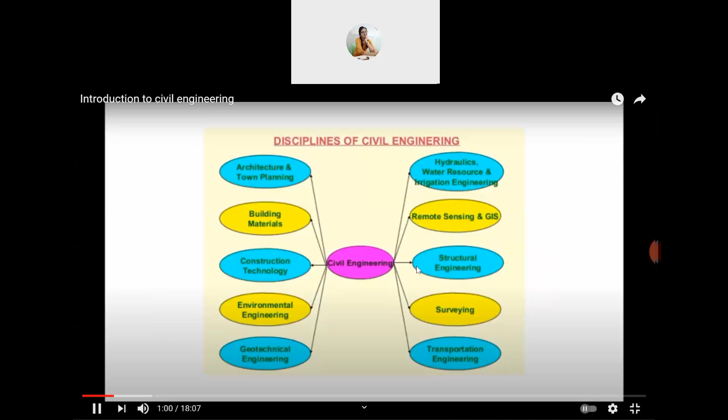So these are the disciplines of civil engineering. First one is architecture and town planning. What is the importance of architecture? Architecture gives beauty to buildings, enhances the appearance, and maintains heritage. Town planning is now separated from civil engineering.

Town planning includes planning the layout of the town, planning roads in different gridways, separating commercial, residential, academic and industrial areas, planning green belts. Very important is planning proper sewage and disposal units, water treatment plants, and water storage units. These are all included in town planning. It was once part of civil engineering, but now it is separated.

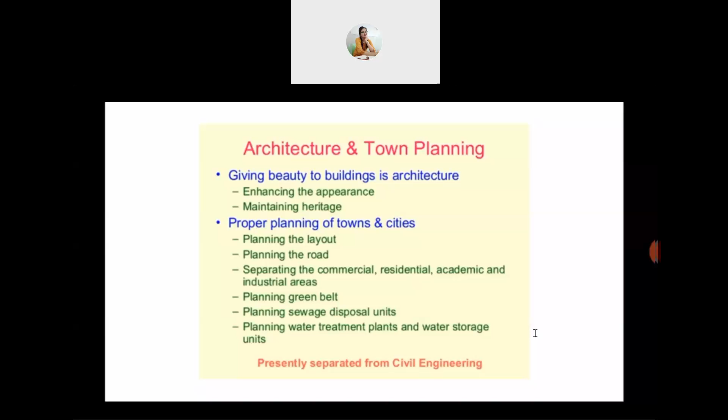Next is building materials and technology. What are building materials? They are the materials used for construction of buildings - bricks, tiles, soil, cement, stone, sand, steel, etc. These materials can be available naturally or some are man-made. These days there are many new technologies and trends in the manufacturing process of building materials, and different varieties are available today.

So what does this building material technology deal with? It deals with proper use of desired material economically and safely. It is very important to use desired materials. There are many materials available, but it's important to choose the desired one, which is economical, and which is safe to use.

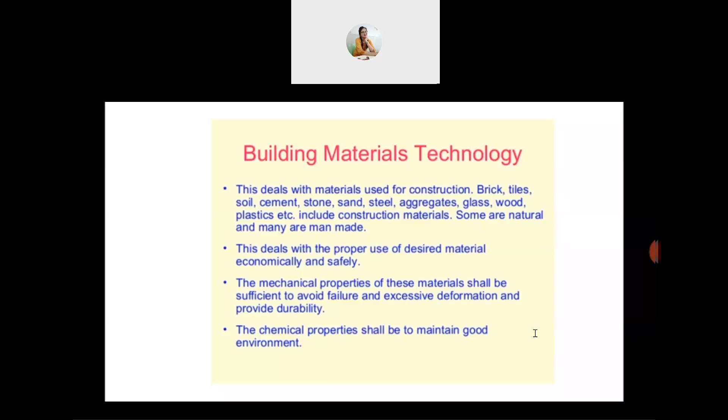Construction technology and management is one discipline which deals with planning, scheduling, execution of construction activities related to a project.

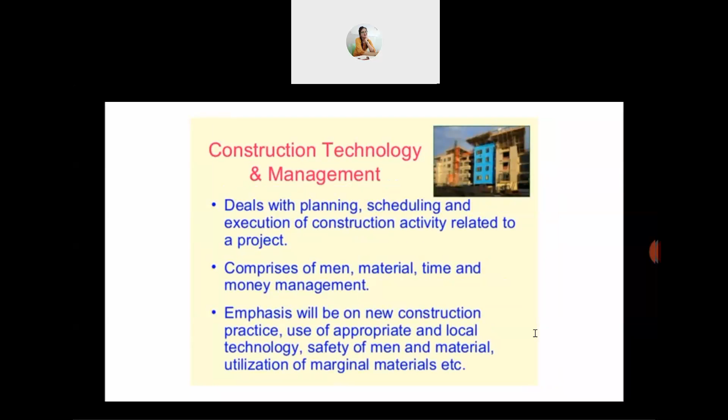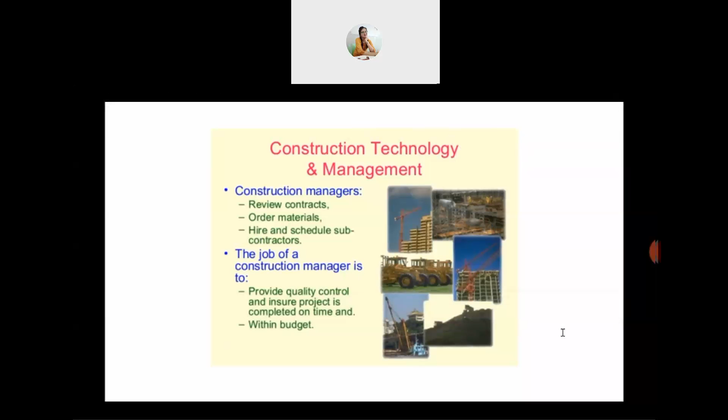So what exactly do construction managers do? They review contracts - you know a contract is a legal document. They order materials and hire and schedule sub-contractors. The job of a construction manager is to provide quality control and ensure the project is completed on time, within budget. As discussed, when we choose a building material, it should be economical.

Next discipline is environmental engineering. Generally people think environmental engineering means the study of environment around us. But what it actually deals with in civil engineering is the technology to save nature from human and natural abuse and pollution. The study involves a balanced compromise between environment and safety.

It deals with the technique of water collection, purification, and supply - we need to supply drinking water which is potable. At the same time, wastewater collection - we need to collect waste from different buildings, whether commercial, industrial, or residential. It deals with how waste is collected, treated, disposed of, or reused, and also control of all types of pollution, solid waste management.

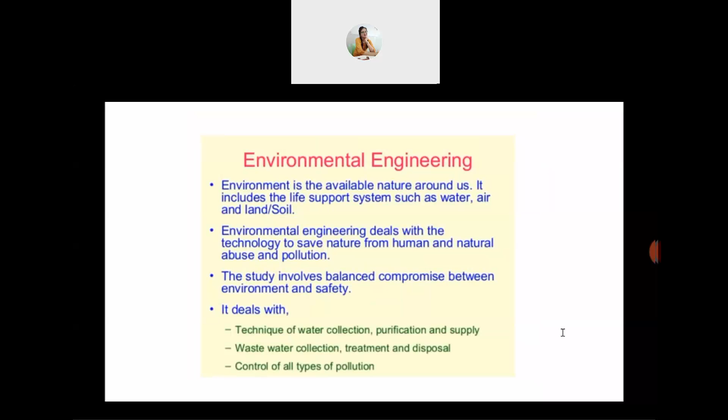Environmentalist versus environmental engineer - these are different. An environmental engineer deals with the technique of water collection, purification, supply, wastewater collection, treatment, and disposal, whereas an environmentalist deals with all aspects of environment.

Next discipline is geotechnical engineering. All structures are founded on ground, you know that. So what exactly geotechnical engineering involves is understanding ground behavior, soil characteristics, and interaction between soil and structure. It involves foundations, slopes, retaining structures, highway pavement design, embankments, earth dams, tunnels, underground structures, etc.

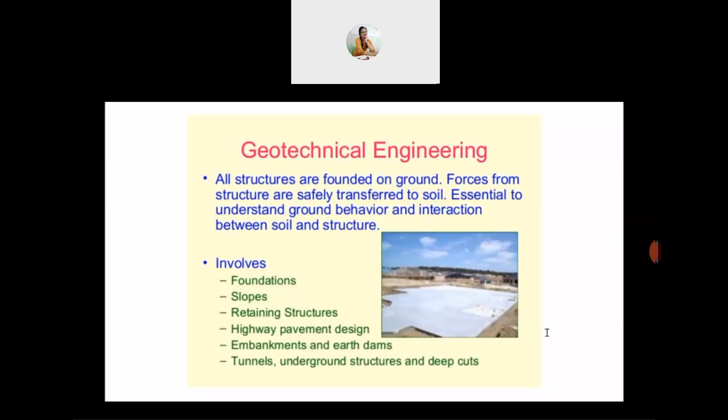What exactly is a foundation? Foundation is a structure which takes the loads from superstructure and distributes them to the soil safely. It is a very important element of any structure. In geotechnical engineering, we assess the quality of soil and rock to carry the structure. If the soil quality is not good, we either replace the soil or go for deep foundations. So proper knowledge of geotechnical engineering is very much necessary for safety and stability of structures.

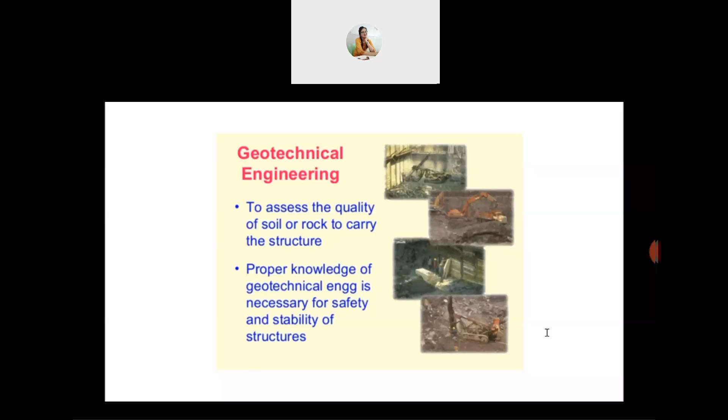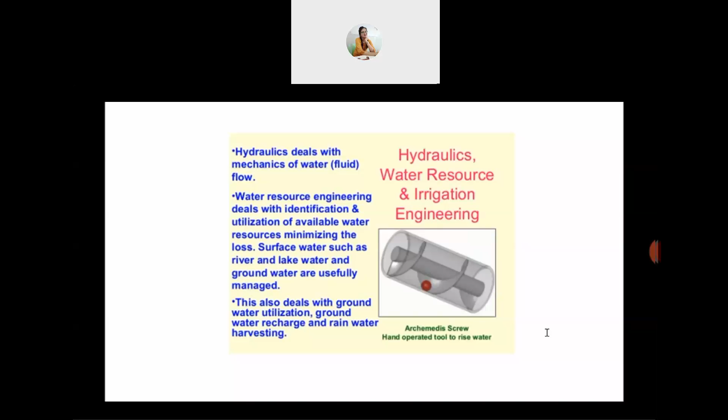Water resource engineering deals with identification and utilization of available water. Irrigation, you know what exactly irrigation engineering is - engineering dealing with irrigation is called irrigation engineering. Groundwater utilization, groundwater recharge, and rainwater harvesting - all these things come under irrigation engineering.

Next is hydraulics, water resource and irrigation - this we have already discussed. Irrigation engineering deals with water management for agriculture purpose. There will be how water is distributed from the dam to the very field channel.

So what is a dam? Why are dams constructed? Where are dams constructed? Dams are constructed at a desired location to store water. We cannot construct a dam in between a town, right? We need to construct a dam where a river is flowing, and we need to store the water in a reservoir. We need to supply the same for drinking purpose, agricultural purpose, and many water supply purposes.

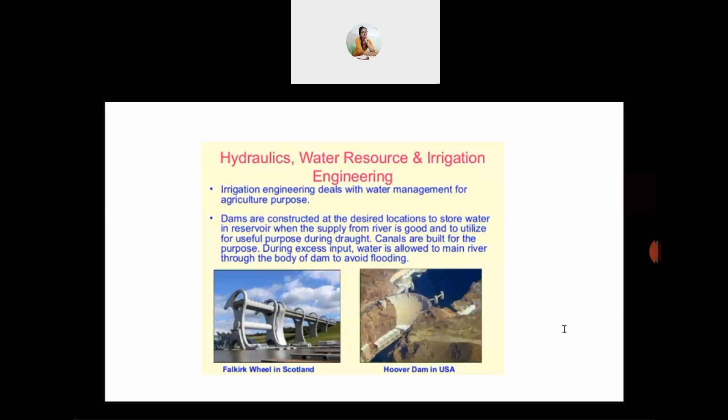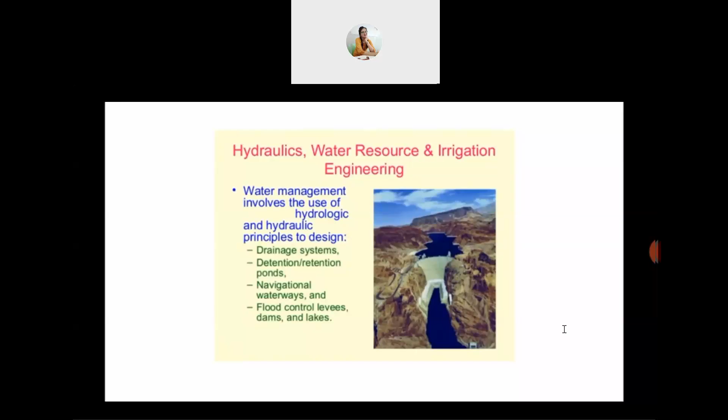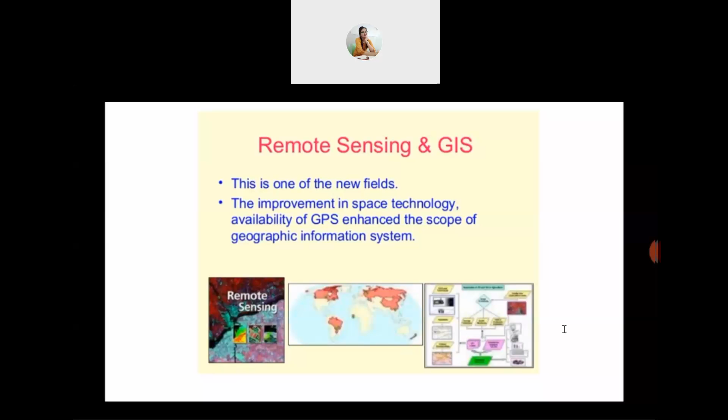Next is remote sensing and GIS. GIS is geographical information systems. These two are among the new fields. They deal with improvements in space technology - how we can collect the data from space, satellites, how the data is collected from space, how it is processed, and how it is utilized by civil engineering. It all deals with the subject of remote sensing. So all the details I have given you in this slide.

Good mapping technique helps us to get required information accurately. You know what is a map, and how it is useful? So all these things are included in this slide. Please go through this slide.

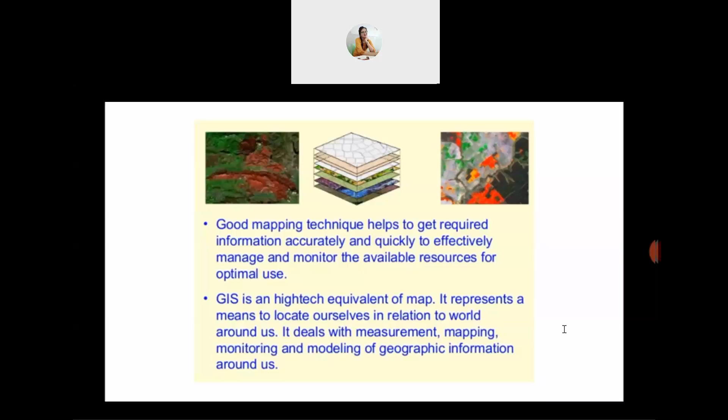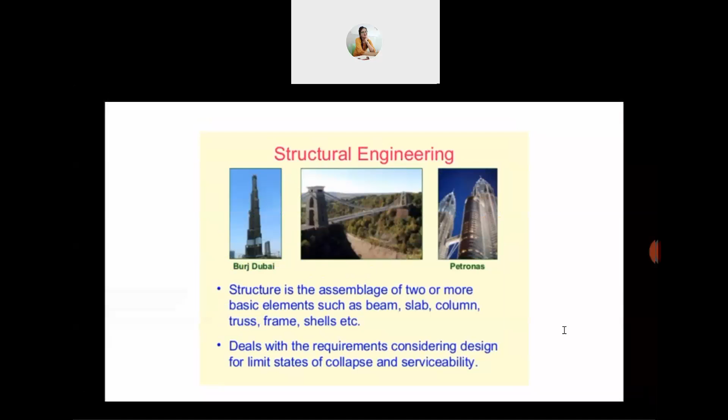Next discipline is structural engineering. What is a structure? A structure is a series of connected, interrelated elements that form together a system which can resist a series of external load effects applied to it.

Next discipline is surveying. Surveying is the art of determining relative positions of various points on the earth, above the earth, or below the earth. So what exactly do we do in surveying? We find the relative positions of various points. How is it useful? Surveying is useful in collection of data.

What kind of data do we collect? We collect data of topographic features of a location for future construction. They help us in preparing plans or maps in detail which may be used for the construction purpose.

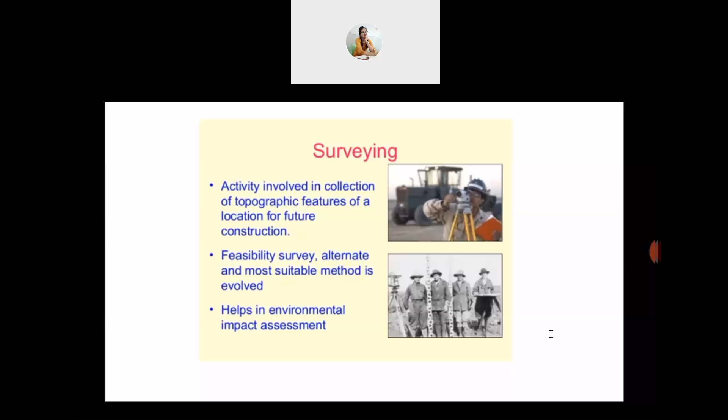Next is transportation engineering. What exactly does transportation engineering deal with? It involves planning, designing, construction or operation, and maintenance of transportation facilities.

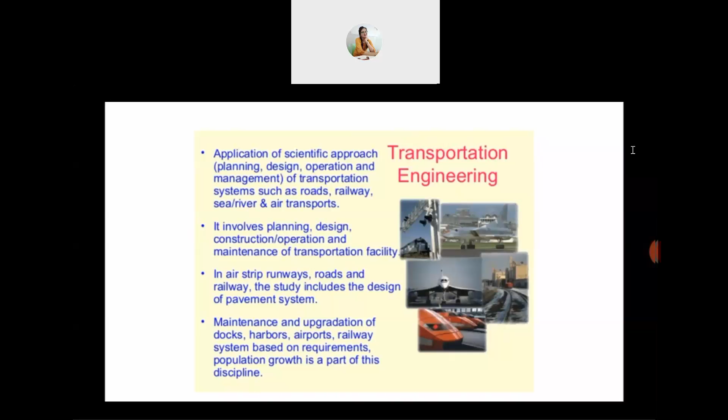So what is a road? You know what a road is, right? Road is an identifiable route, way, or path between two or more places. Road is simply any pathway for riding.

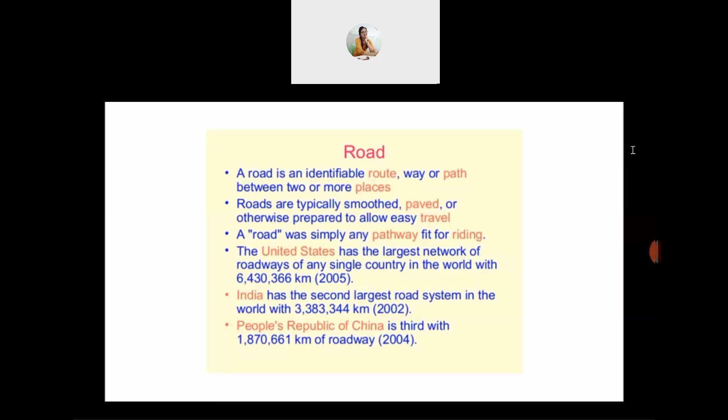Bridges - a bridge is a structure built to span. It is designed for trains, pedestrians, or road traffic, a pipeline, or a waterway for water transport or barge traffic.

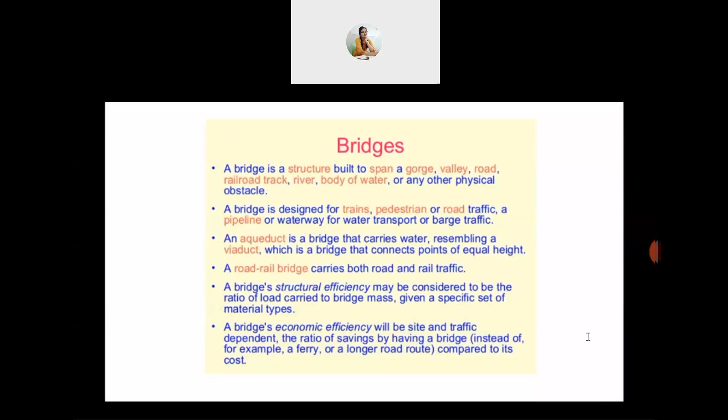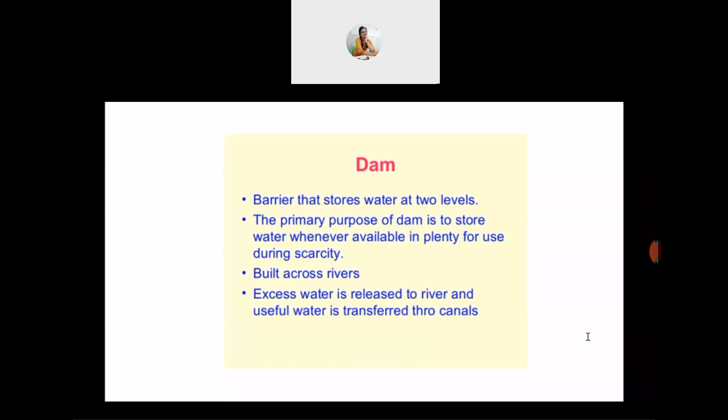Next is dam - you know what a dam is, I have already told you in my previous slides. Dam is a barrier that stores water at two levels. The primary purpose of a dam is to store water whenever available in plenty for use during scarcity. That water can be used for drinking purpose, domestic purpose, and agricultural purpose.

Next discipline is infrastructure. What exactly is infrastructure? Infrastructures are the structural elements that allow for the production of goods and services without themselves being part of the production process. For example, roads allow transportation of raw materials and finished products.

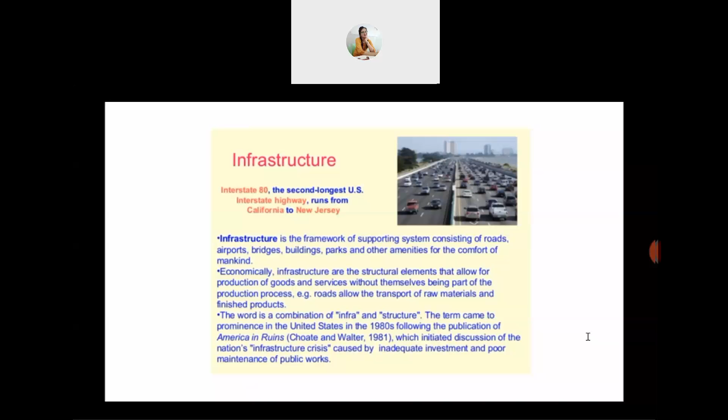So what exactly infrastructure deals with is transportation. Transportation includes road network, railways, ports and harbors, air travel, and airports. Second is television network, which is also a means of communication. Telephone network includes landlines and mobile phones.

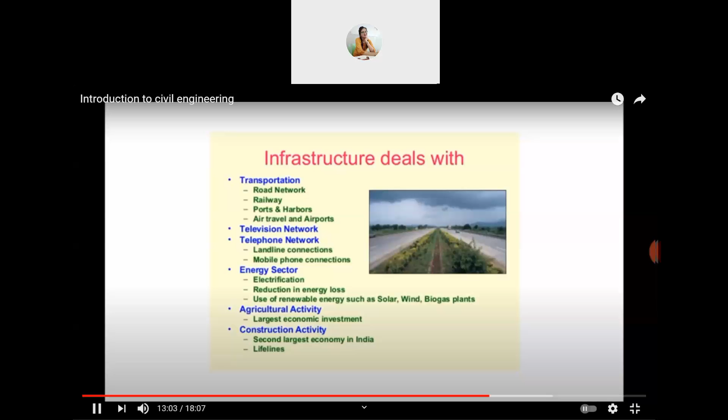So what exactly does a civil engineer do? He analyzes long range plans, survey reports, maps, and other data to plan and design projects. Without maps, we cannot plan or design projects. He collects all plans, survey reports, survey maps, and other data useful to plan and design projects. And he will also consider construction cost.

I have already told you how cost plays an important role. For example, there are two bricks available: one costs 16 rupees and another costs 12 rupees. Which are you going to buy? When both give equal quality for the structure, we'll definitely go for the lesser cost.

So he will be considering construction cost too, and we need to follow government regulations. There are many regulations given by the government which we need to follow. Potential environmental hazards must also be considered, since we cannot construct a building which will affect the environment.

To reduce the impact of environmental pollution, we go for green buildings, which are eco-friendly buildings. Whatever types of building materials we use, the disposal methods, and the way we get electricity - in green buildings we use natural resources, recycled products, or eco-friendly materials.

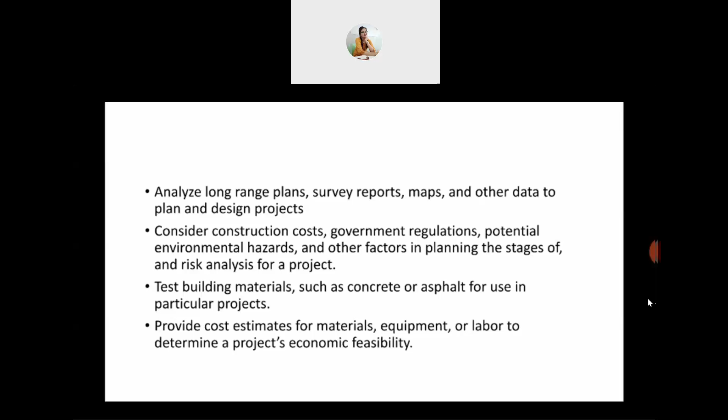The next role is to use design software, for example AutoCAD and STAAD. So he needs to have knowledge of software, and at the same time he should use the perfect software which gives more output.

He should also have knowledge of hydraulic systems and structures in line with industry and government standards. He should have knowledge of codes - for example, IS 456 is the basic code book used for plain and reinforced concrete. He should also be involved in maintenance, repair, and replacement of public and private infrastructures.

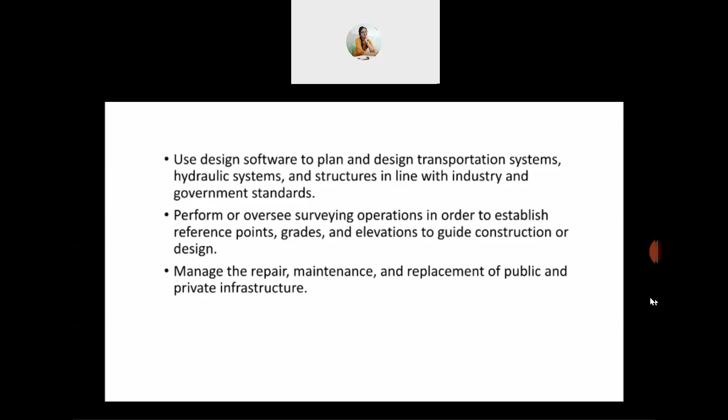So guys, this is about introduction to civil engineering and civil engineers. Civil engineering has a significant role in the life of every human being, though one may not truly sense its importance in our daily routine. The function of civil engineering commences with the start of a day when we take a shower, since the water is delivered through a water supply system including a well designed network of pipes, water treatment plants, and other numerous associated services.